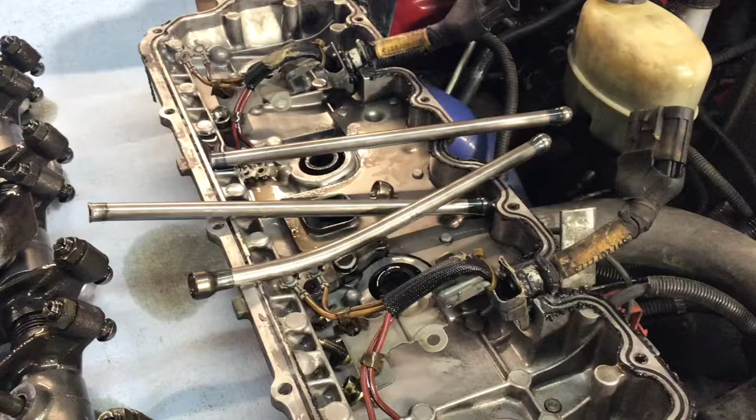Well, those are a little bit broken, a little bit bent, a little bit bad.

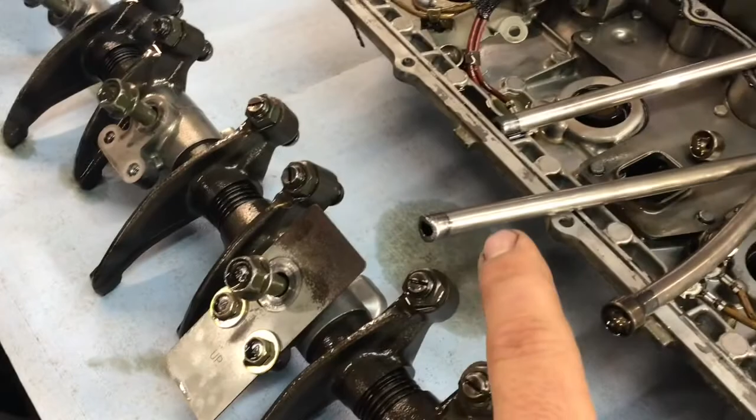So, in order, this was my intake on this cylinder here, right close to the end. I can't remember if that's 1 or 2. Then the exhaust was the broken one, and then the next intake valve push rod was broken but still together. This cup right here was just bouncing around right there.

So I got a hold of Merchant Automotive. They are about an hour from me, and come to find out, the guy I talked to lives about 10 or 15 minutes from me. So I bought a set of high performance Merchant Auto push rods, and I will be replacing all of them on this side.

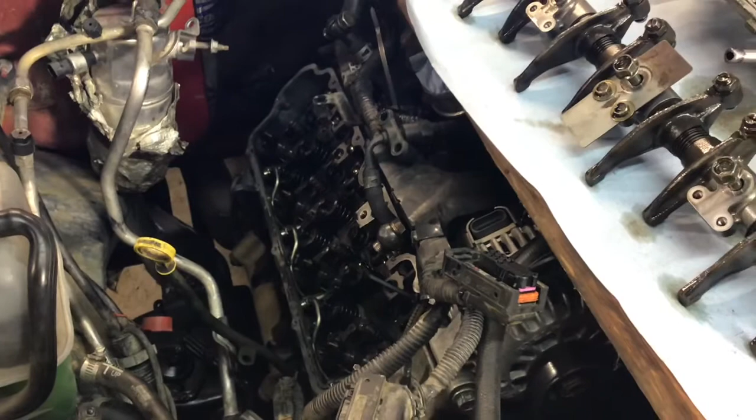But first I'm going to use a straight edge along that lower valve cover and use a depth gauge to check all of the valve heights to hopefully confirm or deny any valve being bent. So that's my plan. If I don't find any bad valves based on the height or depth, I will put this engine back together on this side and fire it back up before I tear that side apart for the repair or replacement of the new push rods.

So I just picked these up from a guy named Joe who works at Merchant Automotive, and I am in so much thanks, I guess, to this company for having some push rods in stock, and for Joe bringing them home from work and having me stop by his house to get them. That's just awesome service right there.

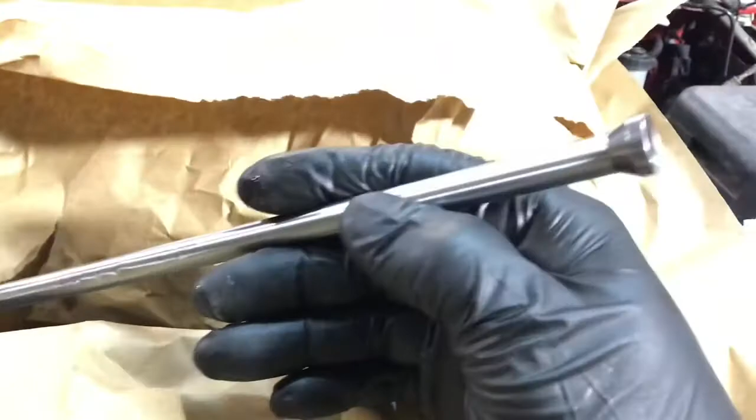So I do believe that they believe in long-term relationships based on integrity and personal service. That's pretty awesome. So let's take a look at these things. These are awesome. They look to be one piece, and they're not like welded tips. They're monsters. So I already like them better than stock.

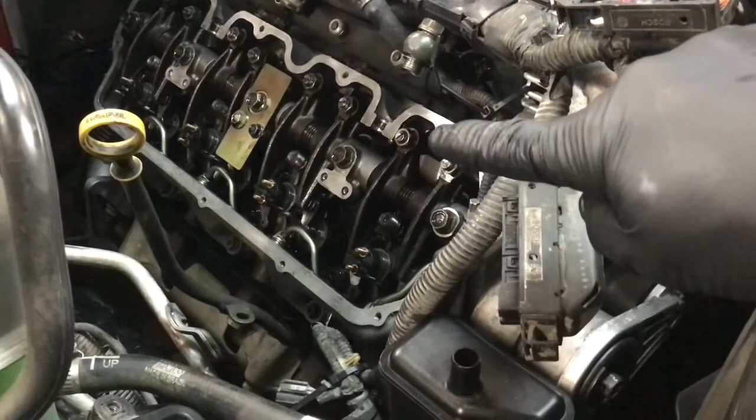I've got this side put together, and I'm going to roll it over a few times by hand and just look at stuff. I also broke loose all of those nuts there to adjust the valves. And I have a sequence that they sent with the kit for the push rods. I know that I have to measure 12 thou with a feeler gauge at each one of these bridges. But there's a certain sequence in which I can do it based on number 1 or number 4 cylinder at top dead center. And they even taught me how to figure that part out too.

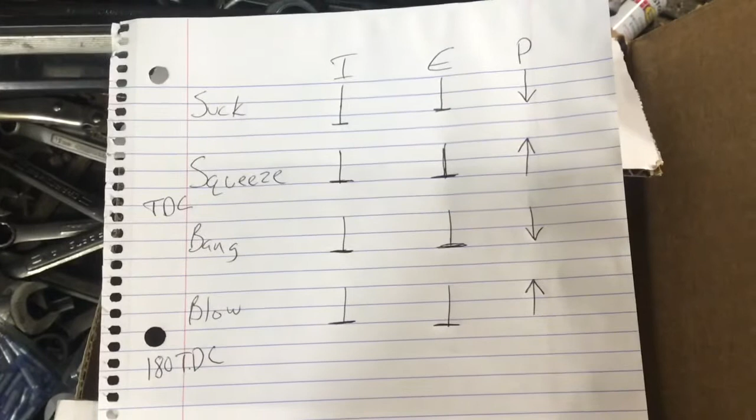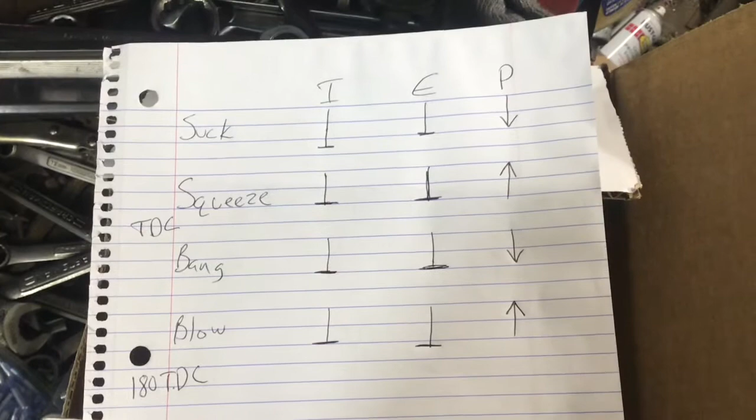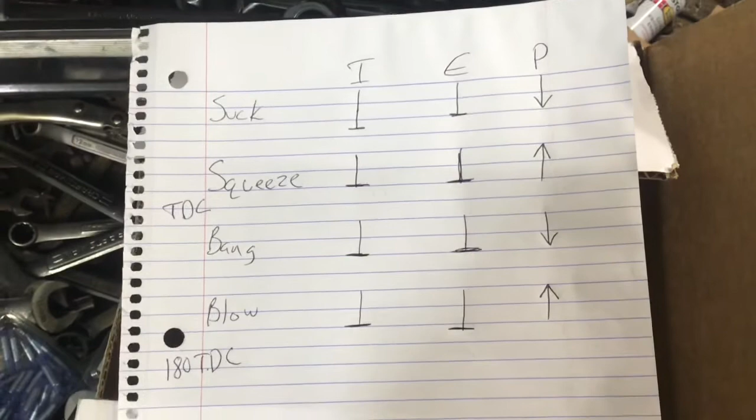Well, this should be self-explanatory. A 4-cycle engine goes suck, squeeze, bang, blow, right? The intake happens when the piston goes down. The squeeze happens when the valves are both closed and the piston comes back up to top dead center. Bang happens just past top dead center, and both valves are still closed. And then blow, the piston's going back up and the exhaust valve opens.

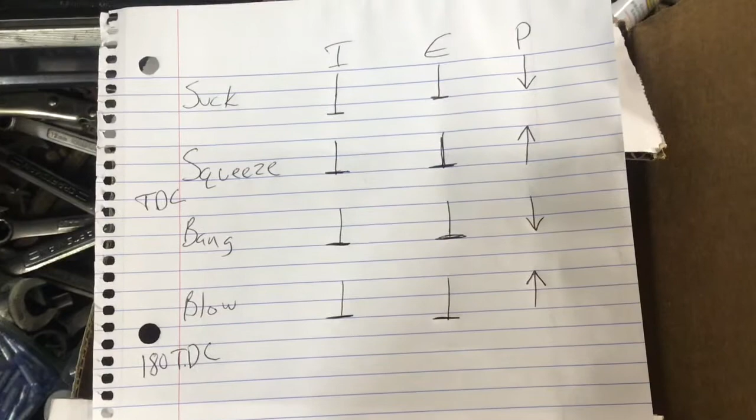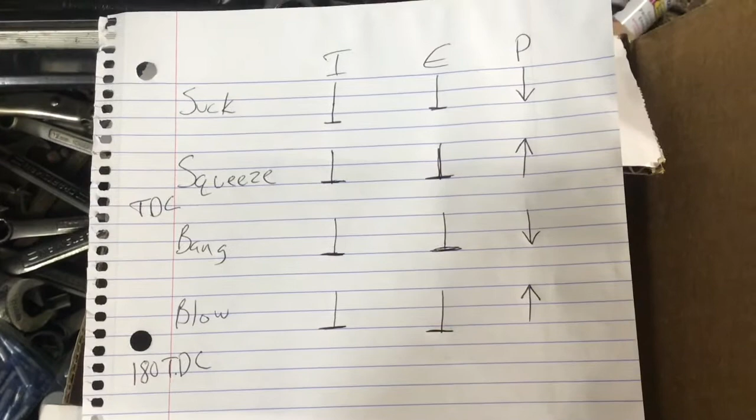So I need to follow this sequence and make sure that I'm at top dead center and not 180 degrees off top dead center. So I'm going to be rotating the crank and watching the valves.

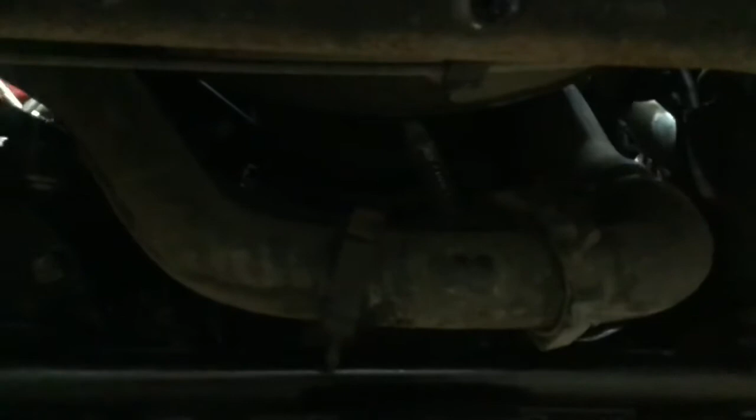It is dark down here, I know, but I found the timing mark on the crank harmonic balancer, and then 90 degrees to the left, or towards the passenger tire on the block, is another mark. So it is currently lined up.

Not like you can see that, but on the last 90 degrees or so towards top dead center on the compression stroke, this is the number 1 cylinder, and those valves need to be closed, which means these push rods need to be down for that last remaining stroke up. That's when the compression is happening, the squeeze before the ignition happens, and it bangs, pushing the piston back down.

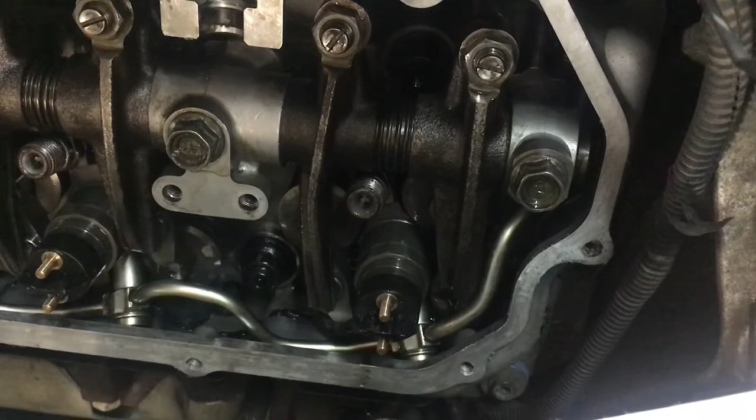So I am just before top dead center, and my quest is to find whether this is top dead center for cylinder number 1 or for cylinder number 4, which is 180 off.

I didn't actually see any valves move by watching that video over, so my guess is that that is top dead center. So I'm going to rotate it one more time and see if those valves move, because one way or the other they should be.

In that last clip you could see that the exhaust was open as I came up to top dead center, so that's the blow cycle. Next there should be the intake valve opening, which would be back to the suck, and as it comes back up to top dead center, both valves will be closed, and that's the squeeze before compression and ignition.

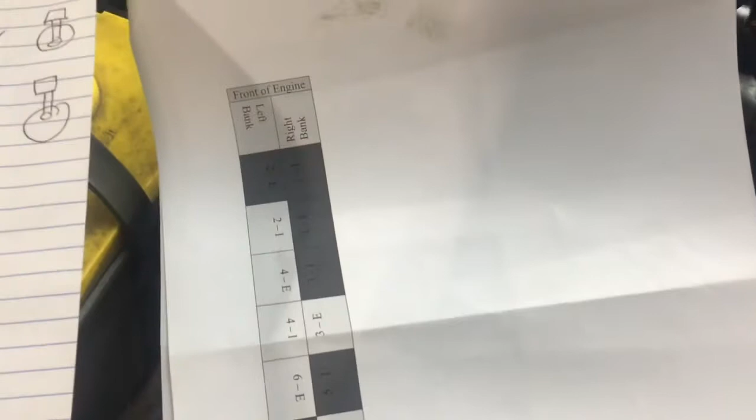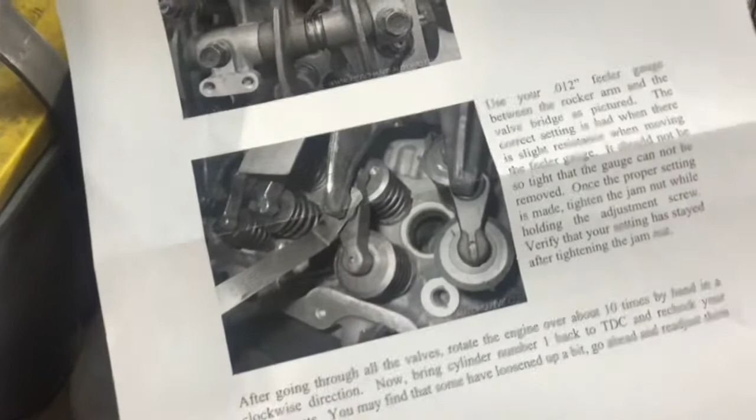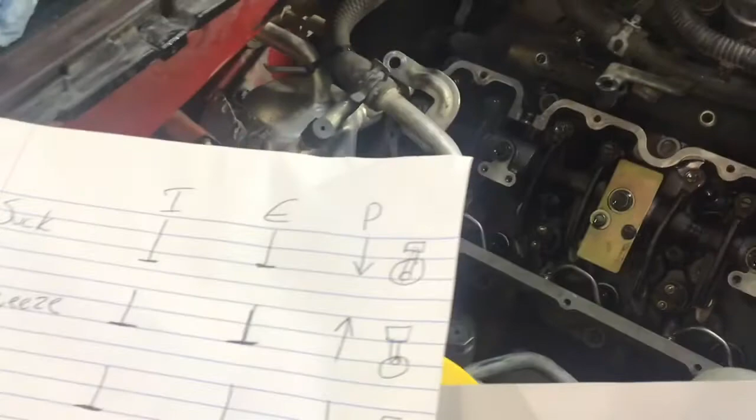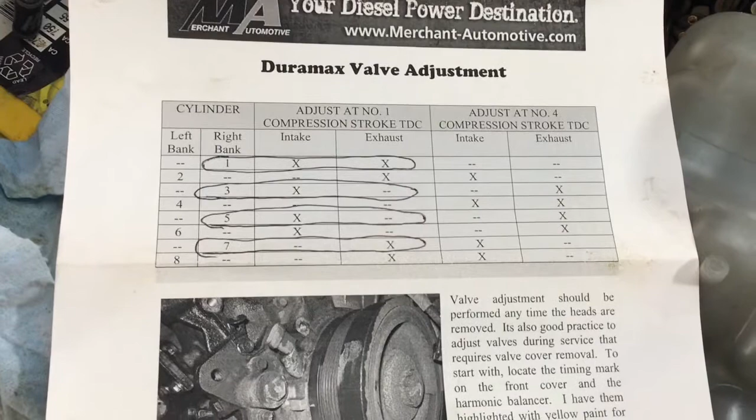Well, all of these valves are set at the top dead center for piston 1. And it's funny because you kind of get to the point where you can feel when you're getting close before you even have to set the feeler gauge in there. But yeah, those are all good.

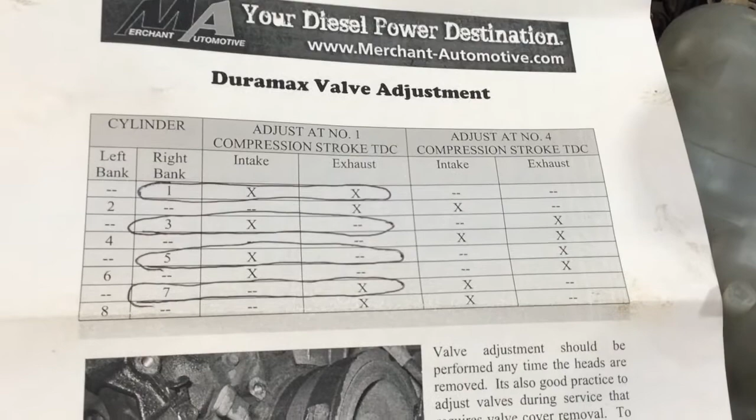I'm going to roll it over 1 revolution or 360 degrees off and hit that top dead center at 4. So I have to do the exhaust for cylinder 3, the exhaust for cylinder 5, and the intake for cylinder 7.

So the whole bank is done now, and now it's time to rotate, they say 10 revolutions of the engine before I check it all again.

All the valves were good, and the 12 thou gap with the feeler gauge was spot on after all those revolutions. I did lose count, but it was a lot, and it was enough to make sure everything was in place, I guess.

So it's time to clean up that valve cover and get it glued back down, and see if this thing is running any better. I know it's going to be running better, but I'm making sure that this is taking care of the job, and if that's all good, then I'll do the other side. If there's still a bad noise, then it's kind of pointless to move on.